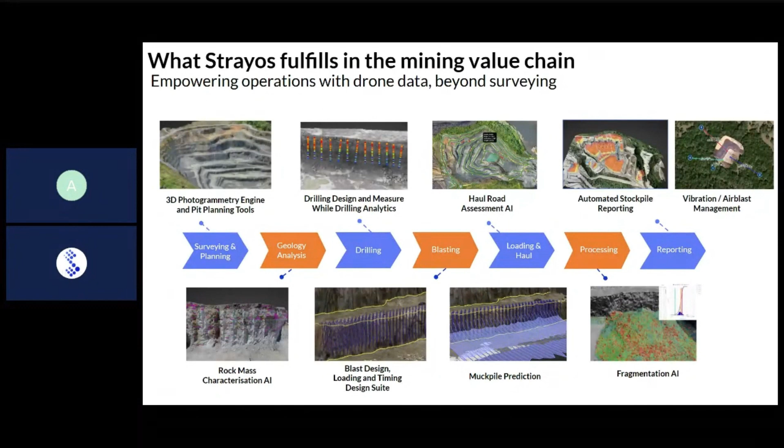Strayos is really a one-stop shop software with its internal photogrammetry as far as its value chain of processing information. At its core, Strayos is its own photogrammetry engine where we can process imagery in data sets, pre-processed models to perform a lot of different tasks within the same software. That really starts with the survey and the planning, moving through geology analysis, drill and blast, loading and hauling analysis, as well as post-blast analysis, as well as stockpiling and reporting, all of these modules together through a lot of automated reporting features.

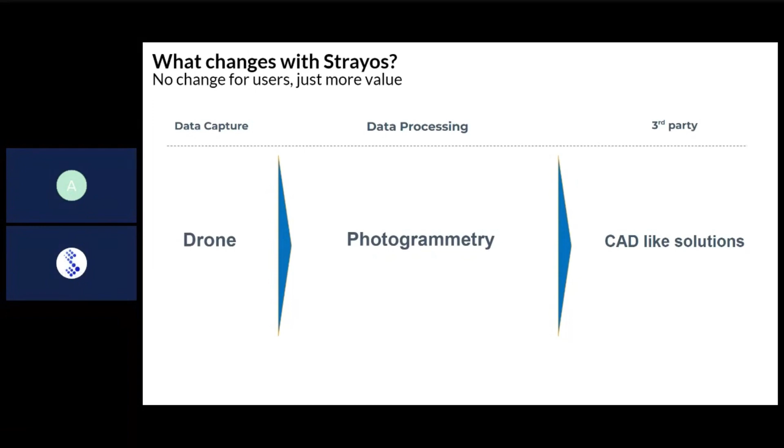So for the end user, it really starts with the data capture. The workflows are essentially going to remain the same for the end users, and that's flying the drone, capturing the data, processing it using photogrammetry, and then bringing those into, let's say, third-party solutions such as CAD-based softwares. However, now with Strayos, this can all be done within one software. So instead of processing photogrammetry in an external software and bringing it to third-party softwares, it can all be done within one.

So here, again, the data capture can be carried out and uploaded to Strayos' cloud-based platform, where we can process using our own photogrammetry and our AI modules to get more value out of one software. Again, a lot of the outputs of Strayos can still be brought into third-party solutions for further analysis. However, the photogrammetry processing and the analysis that can be run in Strayos brings more value to the data capture that's being done.

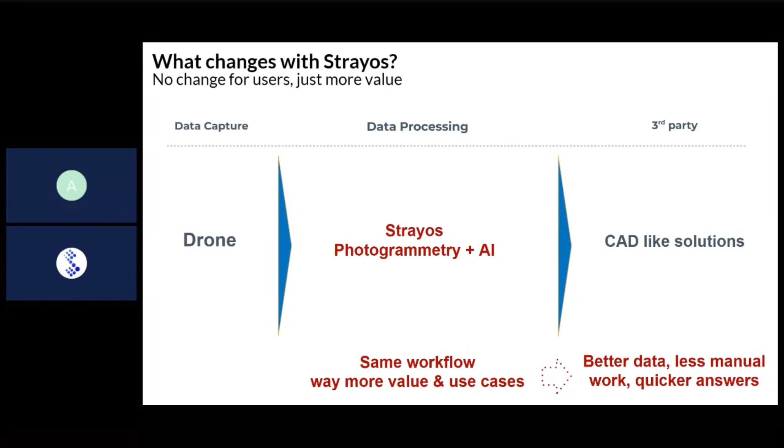So with that being said, we're going to transition into some of the modules and the AI features within Strayos, really where this value comes from. And we're going to look at some use cases, specifically in the quarrying and the mining environments, starting with inventory management. And you can see as we work down the list here, we'll touch on several topics where it really ties into those direct operations that Adrian mentioned.

So beginning with the inventory analysis. Strayos really incorporates its AI in stockpile detection and applying this to the site and the data that's being flown. So this is going to really cut back on the surveying costs of these piles, where a drone flight can capture the data much faster than a standard survey crew. And we apply AI to this with the auto detection of these stockpiles, where users can then apply their material databases to those piles to achieve volumes, tonnages, prices of the materials they have on their site.

Now, this serves as a direct workflow, whether the surveys are being conducted daily, weekly, monthly. There are dashboarding features here where these materials can be tracked on that frequency basis. Again, you use the AI to really cut back the time of the survey cost in the analysis of quantifying these materials.

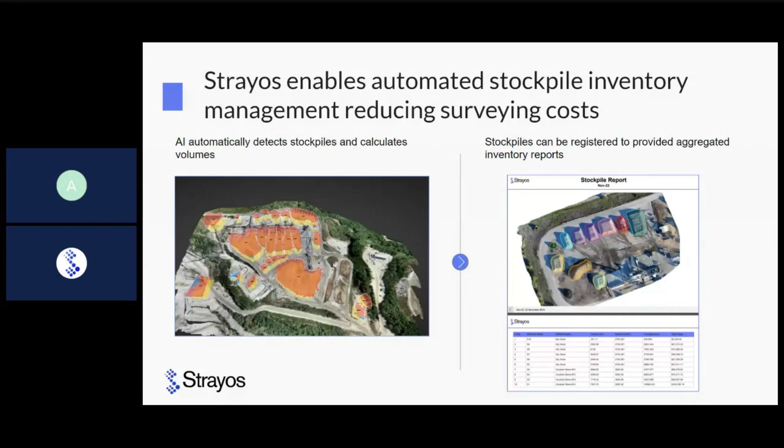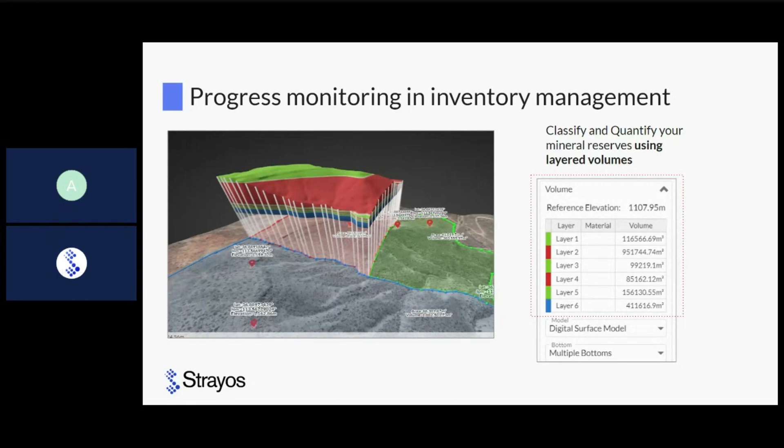Now, we can also apply this to some monitoring of inventory on site. So yes, we can monitor the stockpiles and volumes, but also if we're doing some short to mid-range pit planning, really monitoring how much material is being mined or removed from the site, whether that's through a stripping operation or monitoring material that's been quarried or mined at different level of benches. There's multiple ways where we can run this analysis in Strayos to quantify that pit progression over time and convert it into inventory management.

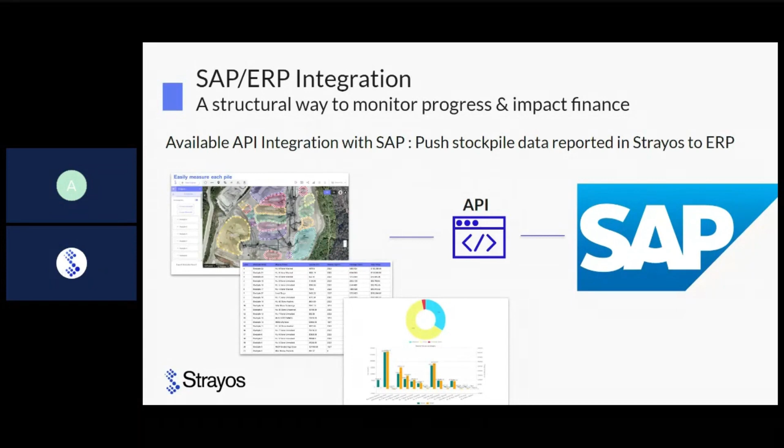We also have an API integration with SAP. It's important to mention where we can push this data reported from Strayos. Again, feel free to reach out to our team for more information regarding this. Did want to mention it here in the beginning with that reporting function.

So moving forward to our haul road assessment, I just want to take a pause here. Adrian, everything sounding clear and presenting well? Yeah, I think that's fine. There was just one query where someone said that they just saw the Strayos logo and not the slides, but that only appears to be happening for the one person, Joe. I've just checked with Mike Williams, and his screen's okay, and Mark Little from Tarmac just confirmed that he's seeing it all okay as well. Okay, great. We'll keep moving forward then.

Now, there's a direct benefit and value here where you're getting all this information from that drone flight that you are capturing from the original data. So there's no need to do additional manual surveys for this information. You're essentially getting all the value from that drone flight itself. Now, this information can also be reported and exported in different file formats such as DXFs or CSVs to bring in to third-party solutions.

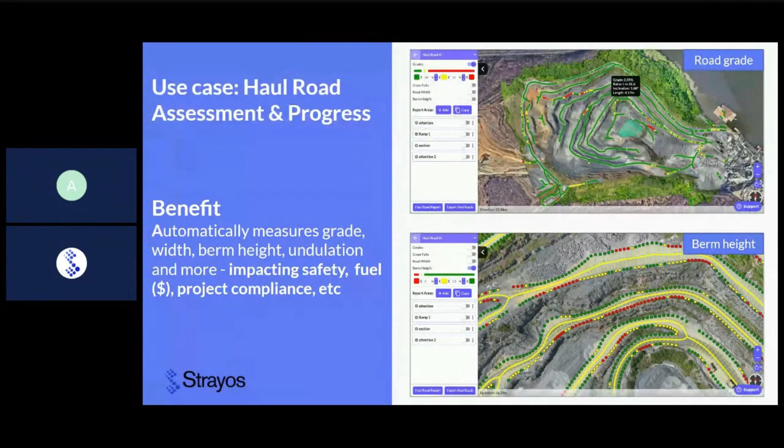But overall, the benefit of monitoring these haul roads is really coming into the compliance and looking at safety, fuel, how these trucks are running on these sometimes larger, lengthy sections of haul road, where grade changes can have a direct effect on the equipment wear and tear and fuel costs. I did mention the progress reporting. So looking at certain aspects of these haul roads here.

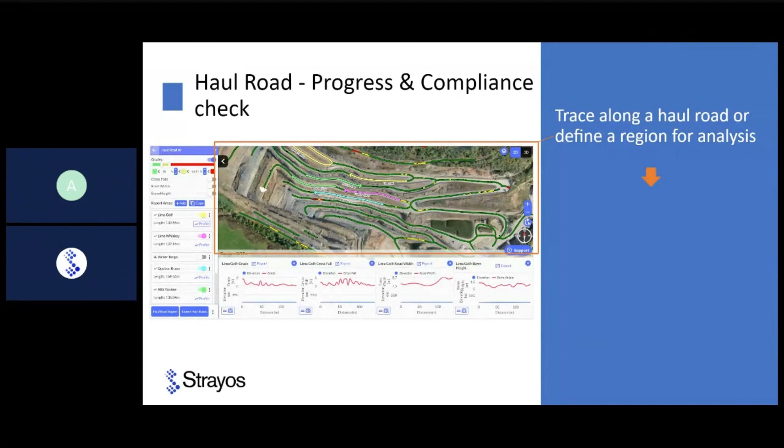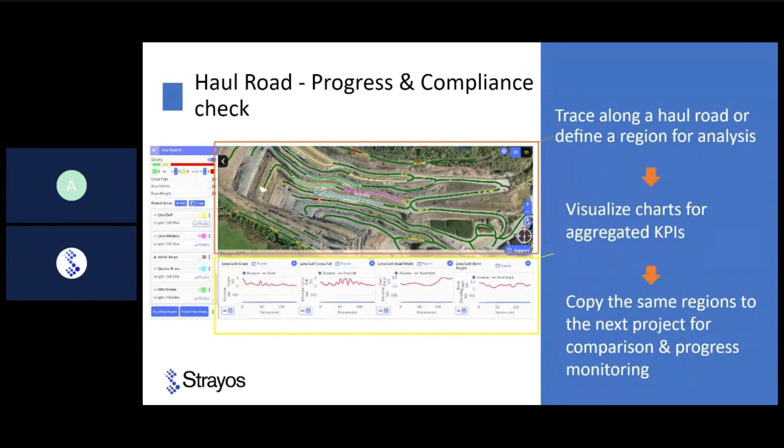So certain cross sections can be drawn or traced where we can report more granular sections of, let's say, grade or road width of areas that we want to further report. You can see the KPIs are on the bottom there, and we can copy these areas of interest, I'll say, from project to project. So if there's sections of haul road that are looking to be analyzed over a time span, if it's under development or if improvements have to be made, those can be monitored flight by flight.

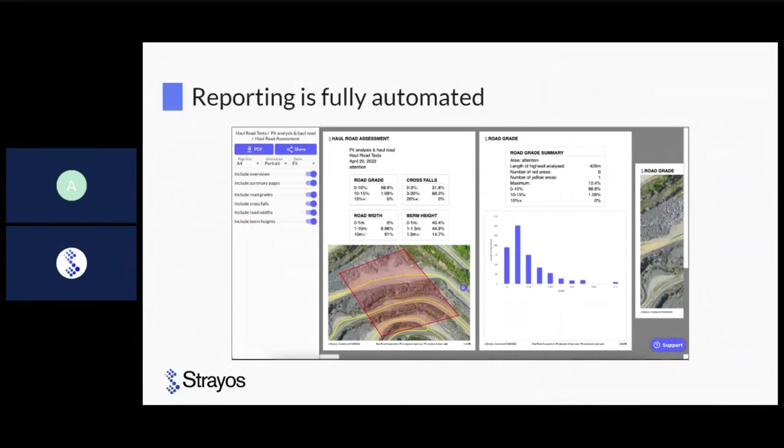Now, I mentioned the reporting as well being completely automated. So with the function of the haul road, as well as some of the other modules we'll cover in Strayos, these automated reports are going to provide the information that can then be shared directly with team members with a PDF or a share link for further reporting and analysis.

So what we can see here is just a snippet of one of the haul road reports where there's an area of interest that has been drawn, showing the grade, the crossfall, road width, and berm height in the thresholds that have been set by the user. So this automated reporting really streamlines the workflow for customers to report what these surveys are producing and what areas may need improvement, may need to be addressed, at a very direct pace here.

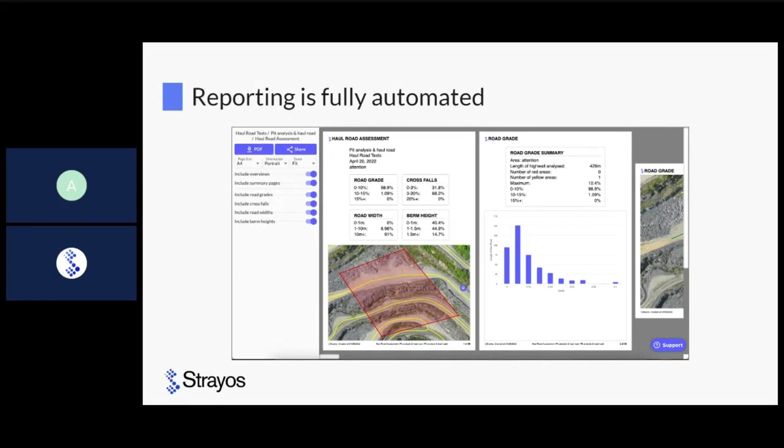So with the haul road modules of Strayos, there's a case study here that we wanted to share where a certain mine customer began to monitor these haul roads, which really ended up in a direct savings of, you can see here, 27% for the transportation of 10 million tons of material. Looking at the crossfall management as well, after precipitation events, rain, snow, whatever it may be, runoff, monitoring this condition really helped improve the condition of the road with less maintenance or understanding where the maintenance needs to be addressed, saving in the diesel costs.

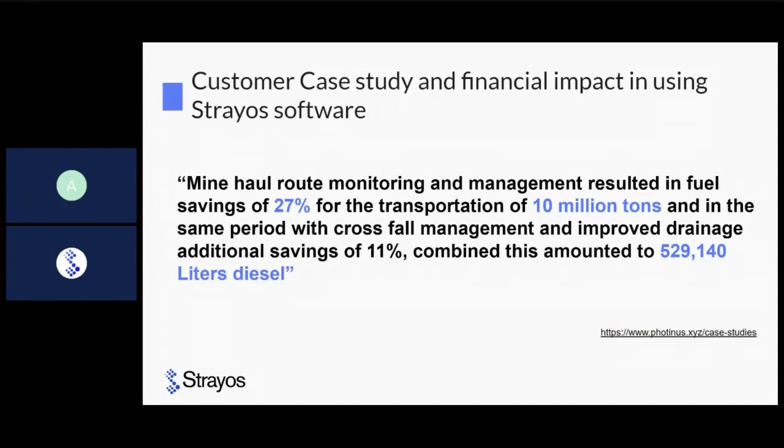So, just one example here, kind of overviewing one larger case study. We're happy to share some of these metrics on how that value can be saved from monitoring things such as the haul roads. To summarize, the up-to-date haul road assessment can really help improve cycle times when you're looking at haul routes, conditions of those roads, wear and tear, especially fuel costs, and essentially helping improve safety. Any road incidents, looking at traffic patterns on some larger sites where haul roads might have a more intricate network. All these points can be looked at and derived from the haul road planning and analysis within Strayos.

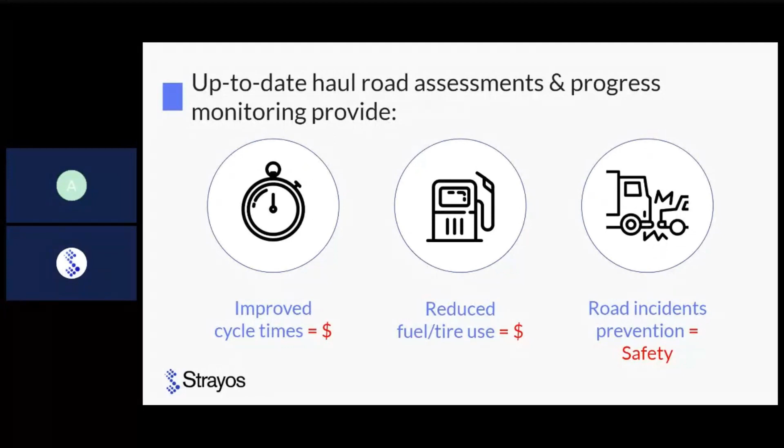So moving along to the high wall and slope safety geotechnical analysis. So another area where we can apply AI to really shorten the workflow that has been done traditionally in a more manual state in the past. With that being said, Strayos has the capabilities of detecting the crest and toe automatically within the site. Based on that crest and toe detection, we can then derive things such as the high wall heights, the face angles and inter-ramp angles, and catch bench widths of the site itself.

So on the images on the right-hand side of the screen, you can see the face angles on the top, as well as some cross sections that are drawn on the bottom. Now, users have the options to set different thresholds here, report certain areas similar to the haul road, where we can analyze this data bench by bench, maybe area of the quarry, to really look at what could be out of compliance, within compliance, where we could be seeing that geology change within the site and how that's reflecting on the physical characteristics of the site here.

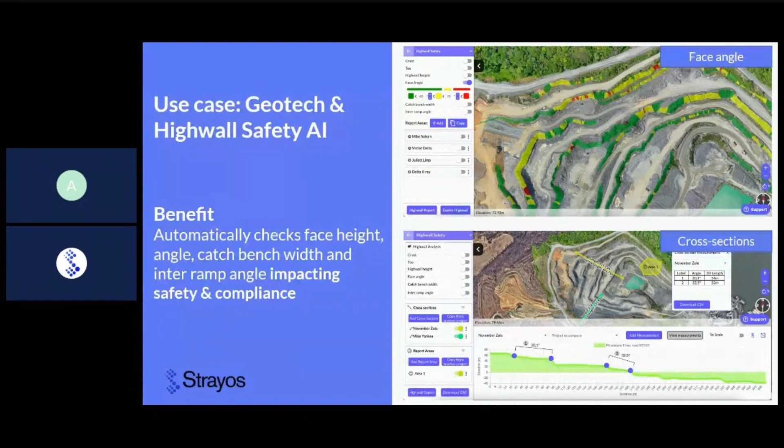Specifically looking at the cross sections on the bottom here, we can see those sections that are highlighted where that inter-ramp angle is shown, as well as the distance and the elevation profile. So the direct benefit of having this tool is it really cuts down on the time of manual surveying, and you're getting this information out of that one drone flight that's been done in the pit. Now, looking at the benefit of doing that, really running on compliance and safety, where we can constantly monitor these conditions based on the frequency of the drone flight.

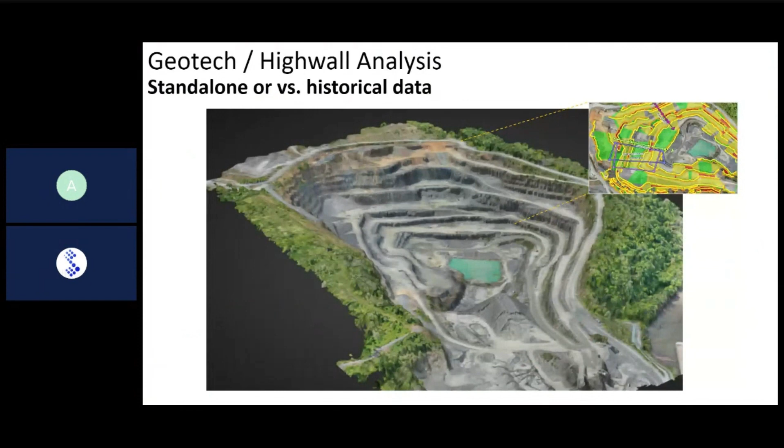So we can see a 3D model now shown on the screen here. And this is really going to allow us to look at the data both in 2D and 3D. The picture on the right here is showing a snippet of the 2D where that crest and toe analysis is being run and some areas of interest that I want to share, what that is going to look at specifically on a statistical basis.

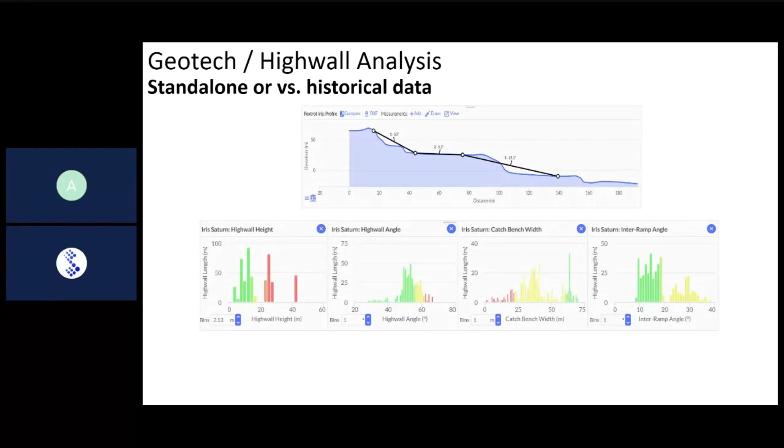So again, with the reporting, I do want to share a little snippet here with the automated reporting on the high wall analysis. Based on the crest and toe detection, again, we can look at these metrics that are being derived, such as the heights, face angles, catch bench widths, and inter-ramp angles. This can all be compiled into that report that can be shared with team members via PDF or share links.

It's going to give a good breakdown of each of these metrics and the area of interest that is looking to be reported. In this case here, on that cover page, we can see the green area that's highlighting that one bench.

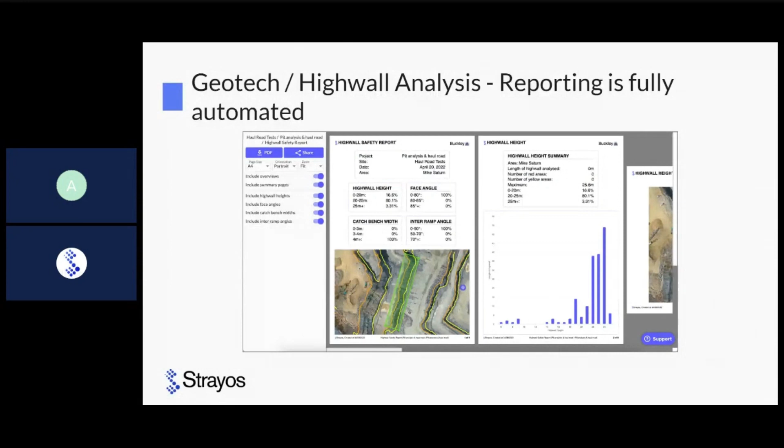So another critical aspect I like to point out here with monitoring is the capability of uploading a pit plan, a mine or quarry plan, surface file, to Strayos to overlay to your drone model. Now, again, taking the value of that one drone flight, what we can do is upload and overlay that surface file to look at conformance.

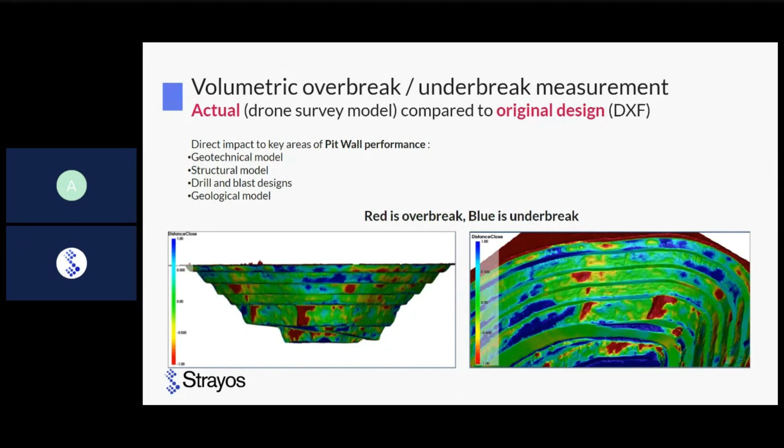And this can be done very easily in the Strayos platform, where with these surface files, we can upload an overlay to the drone model to visualize these metrics. We can also apply AI to rock mass detection, and that's going to automatically detect discontinuities within the rock mass, whether that's bedding planes, faults, joints, seams in the rock face.

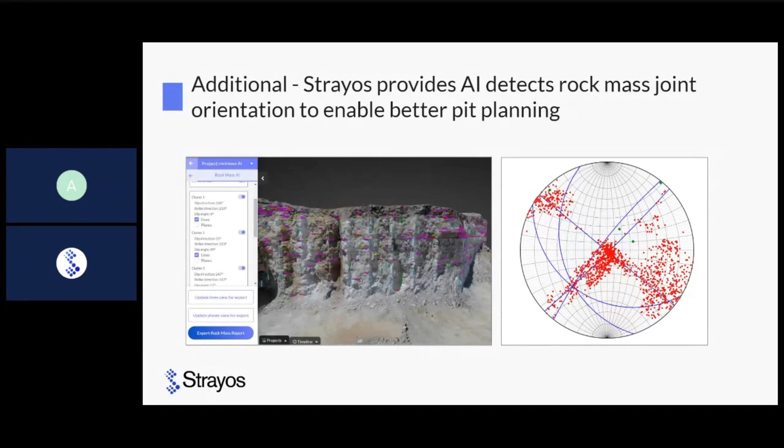It is important to mention tools like this are very valuable, and the data that we input for such analysis requires good accurate imagery with low GSD and some oblique imagery of the face. That high quality imagery gives the best yield of results for this AI detection. So just an important note here I want to share, we want to get the best quality imagery possible for such data output, such as the AI detection of these discontinuities.

So what's the value in these up-to-date high wall assessments? This is providing direct information on our site and the geologic conditions on the site, specifically looking at safety and where we can look at potential high wall failure areas, looking at slope analysis, specifically where we could be seeing changes, whether it's weather events, freeze thaw cycles, how these high walls are changing, where we're seeing commonalities in the high walls.

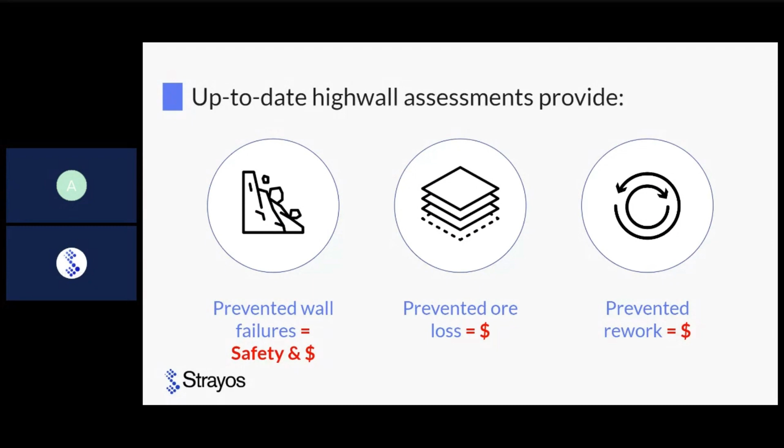We can take a lot of information from these drone surveys to compile and compare over time and how to monitor these conditions. Preventing rework or loss, these go along with that as well. So, looking at the pit progress and conformance.

So, we talked about overlaying some of those design data sets to our, as we'll call them, as-built conditions or the surveyed conditions. Now, with this, we can really monitor volumes, measure mine reserves, identify areas of non-compliance, look at cut fill quantities in several layers, such as elevation models and contours.

Specifically looking at, when we compare these surfaces and monitoring, let's say, cut fill quantities, whether you're flying your site, let's say at the beginning of the month and the end of the month, or maybe on a weekly basis or even a daily basis, we can monitor these cut fill quantities, whether again it may be a stripping operation or drilling and blasting operations. We can run that analysis within Strayos and also overlay different layering if we want to compare contours, elevation models, or those surface files in the DXF to identify areas of non-compliance.

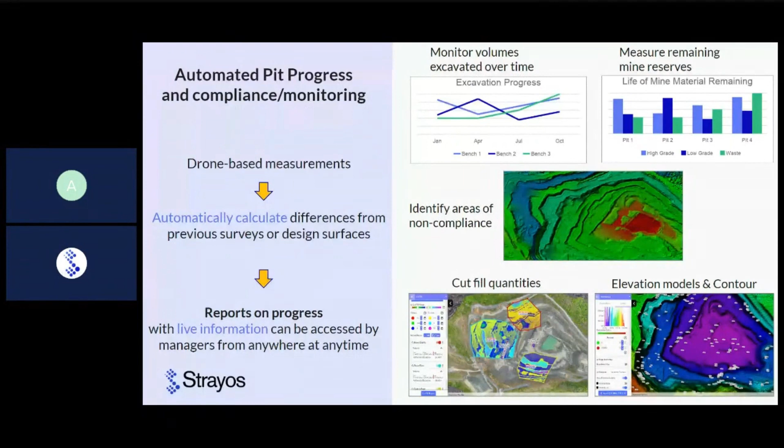Again, the reporting function, we looked at some reports with the haul road and the high wall. It's automated, and you'll see these automated reports in modules such as the cut fill and the elevation exports as well. And this really serves the benefit to the user where you could bring in your drill and blast team to work alongside maybe your quarry planner, quarry engineer to really make sure operations are running smoothly based on the drone data capture that's being done to report these.

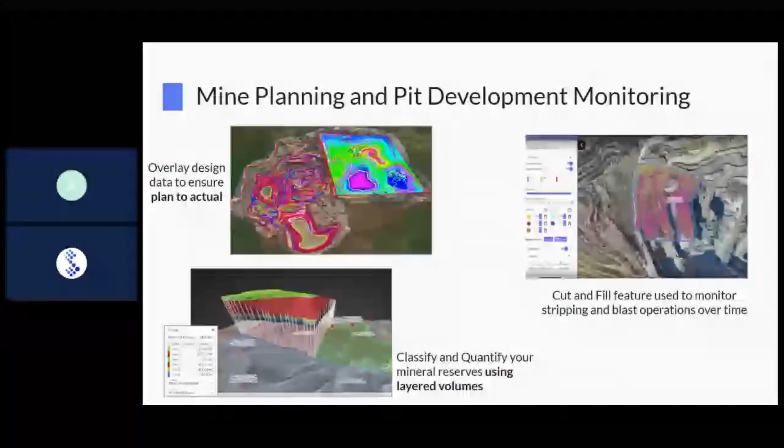This can really help, I'd say, improve the pit development and maintain the operation that's being done by monitoring these conditions. As I mentioned, monitoring grades, elevations, haul road conditions, all these physical characteristics that can slow down the operation can be monitored and I would say kept ahead with to make sure operations run smoothly on a daily basis.

Last example here I'll talk on is drill and blast. Strayos has a robust drill and blast suite of tools where users can create a drill design or bring in, let's say, a drill design that has been done maybe in a third-party software. With that design, that can then be exported to a GPS or maybe a GPS-equipped drill. That can then be used to lay out the design properly based on the model that's been formed by the drone data capture.

Within Strayos, we can export, again, this information to the drill, but also bring information from the drill to really close that drilling cycle. So this really does start with the drone data capture, flying the bench that's going to be drilled and eventually shot. If that's utilizing a GCP workflow, maybe an RTK drone or PPK processing to get the absolute accuracy of that model down to, let's say, a centimeter grade level precision to make sure that information relays to the GPS properly and you're getting the most accurate layout you possibly can.

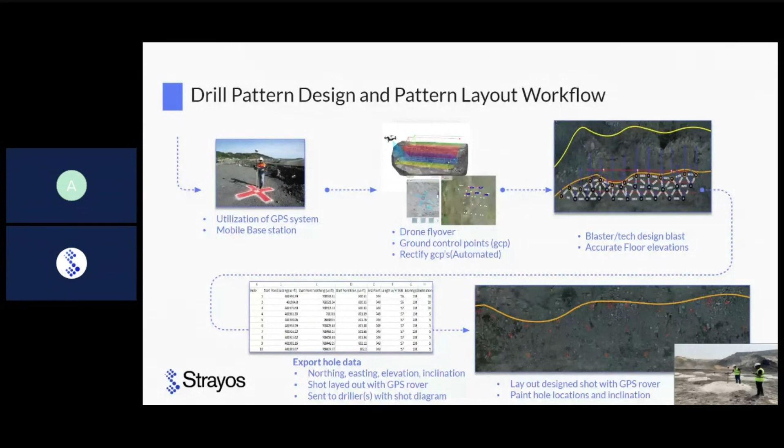And we can really properly load these boreholes based on the condition on the site, the products that are being used, and optimize the timing to adjust, let's say, the throw direction, where we might want to open that shot, or address any vibration concerns. This can all be done within the loading and the timing of the drill design in Strayos.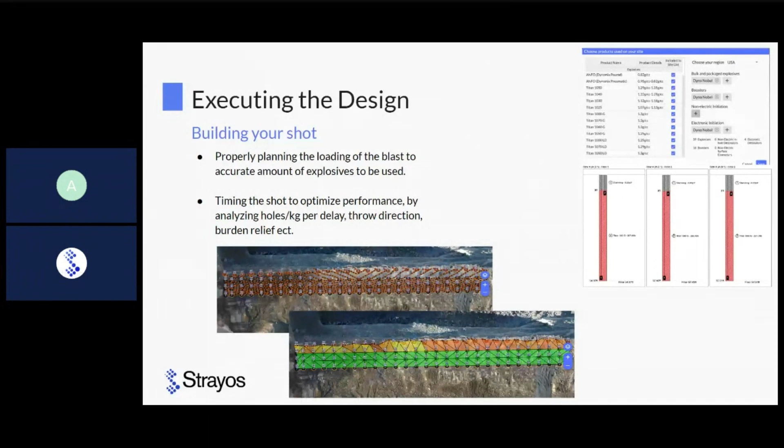Talking a little more about drill control, I did mention it before. Strayos has the capabilities to export these drill designs and the information to the drills equipped with GPS or smart drill capabilities. We pull that information from the drill. So in this case here, looking at a post-drill workflow, once that design is completed, the shot has been drilled. Again, Boretrak. Boretrak is a method of measuring the deviation, inclination of the boreholes.

We can accommodate that data into Strayos as well, providing burden reports and also drill plans post-drill. So with this workflow here, really getting the accuracy of laying out the shots properly, sending that to the drill to be drilled, minimizing drilling costs, extra holes that may have been drilled, drilling to proper grades. There's a lot of value that can come from utilizing this workflow.

Drilling face holes to the correct burden and also measuring that with any Boretrak that is being done on site can really ensure the safety of the loading process when shooting an open face in close proximity to any structures. This again, utilized all in one software, is really where the value is going to stem from.

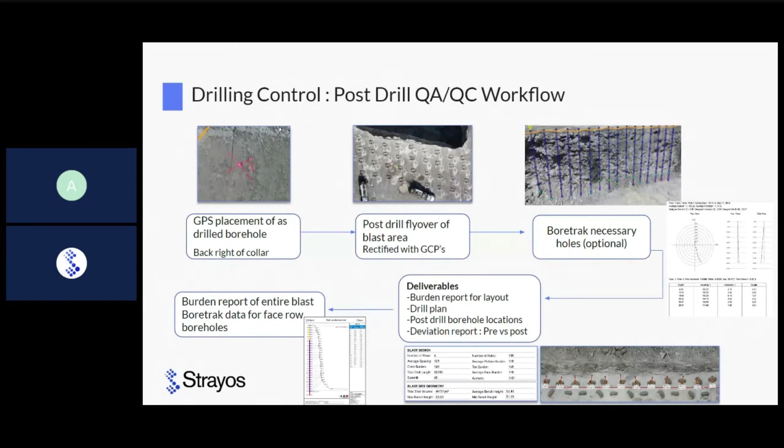One of the unique AI features I want to touch on with the post-drill workflow is the hole collar AI detection. So what we're looking at here in the image is the AI detected boreholes that have been drilled. Now, Strayos has the capabilities to overlay a design to that AI detection where we can see, in this example, the red holes are out of the threshold of deviation based on the design.

So depending on what that threshold is, maybe it's half a meter, maybe it's 1 meter or exceeding. This is telling us that that hole was drilled outside of that design threshold. And this is a good quality control check where maybe the driller couldn't approach that crest as close as was originally planned. Maybe there were seams or voids in areas where that's going to start deviating the hole position.

This is going to help us run a quality control check. And we can see on the bullseye diagram on the left kind of where those holes are falling into place based on the accuracy.

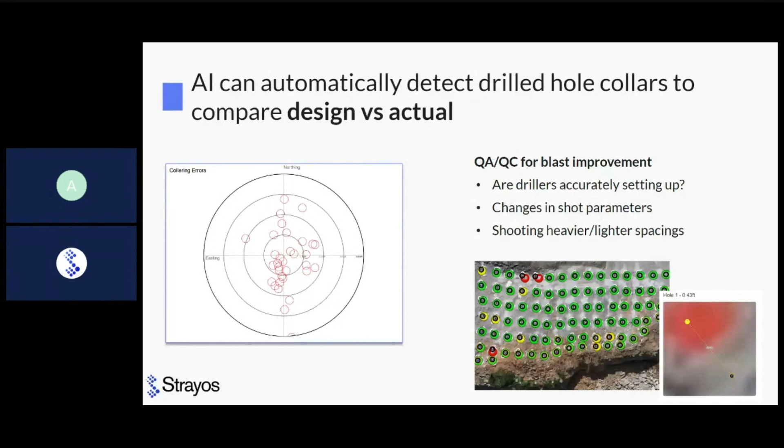Going along with this is our floor control. This is going to allow us to analyze the floor of our pit or quarry and overlay drill designs to that to show any, let's say, high or low spots. Now, this can be run just based on the drone model that has been attained. We can also apply a DXF surface to compare design to this.

However, the value that's going to come out of this is analyzing, again, the high or low spots in the floor. And if that came from digging out, let's say, sub-drill, or a bench wasn't drilled to the correct elevation, we can really look back and overlay these drill designs, as you can see on the bottom right-hand side of the image there, to what shots or even what holes may have correlated to those issues.

In that image as well, you can see the green areas are right on grade to that set elevation of 3.87 meters, where the red area starts approaching 8 meters below, and the blue area is about 8 meters over. So pretty big elevation change there in this example, but you can really fine tune this to a meter or a sub-meter level to look at the smaller granular changes in the floor based on, let's say, the drilling and blasting operation.

Again, this is going to serve, let's say, the loading and the hauling: the smoother the floor, the smoother the operation. If you start seeing high or low spots, this can really help you address where those grade changes could be occurring, whether it is from the drilling or the loading and hauling process.

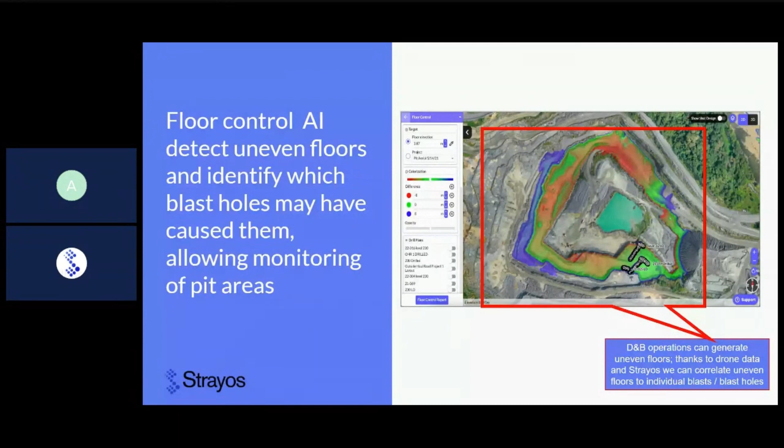Another real example, kind of more of a case study here: analyzing the post-drill condition versus the design can really look at potential fly rock areas or maybe even cut-off potential if holes are too close to one another, and how we're going to adjust our timing or our loading practices based on those conditions.

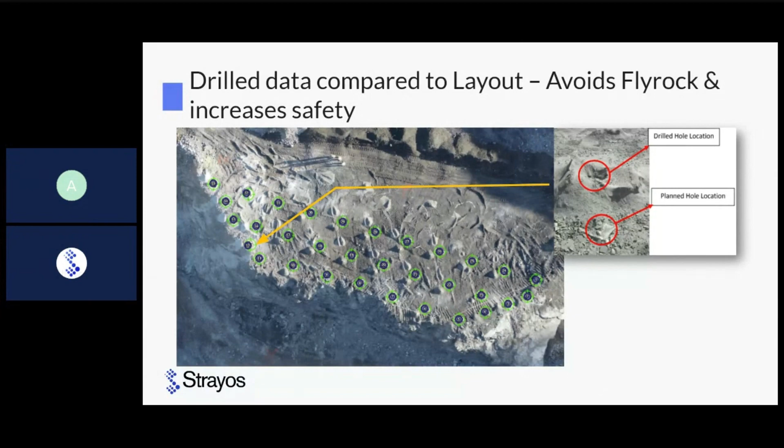If you have the luxury of flying these benches pre-blast but post-drill, you can look at those design changes before showing up the day of the shot, where you could be making some critical decisions in a short amount of time. This allows explosives engineers, blasting engineers to really look at their as-drilled designs before showing up that morning to blast and make those changes to their loading and timing plan.

Lastly, with the drill and blast process, here is the fragmentation topic. Where we can apply AI to this is the automated detection of the muck pile post-blast. Strayos can run predictions and also analyze the post-blast muck pile to report the fragmentation results.

Now, this can be done, again, with the drill design that's been accomplished through Strayos. You'll achieve the prediction, as we can see on the right-hand side here, with the distributions shown in the distribution curve and the parameters shown on the left-hand side. And then on the left-hand side of the AI measurement, this is showing the post-blast muck pile, where we can run the post-blast analysis and report those actual fragmentation measurements based on the AI.

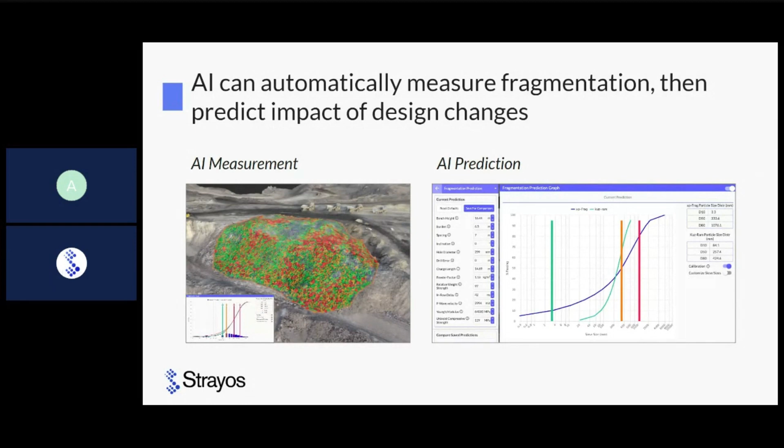Again, a valuable tool to use to really analyze that post-blast result and look back to address any design changes. If there's excess oversize that has been seen on the site or excess fines, really start to adjust that drill design to achieve the optimal outcome that's being looked for on the site.

This can also be applied to the muck pile as well, where we can look at a full cast analysis of that muck pile, looking at elevation profiles, the center movement, average height, maximum throw, average throw of that muck pile, to really look at the blast performance, whether we need to maybe speed up our shot a little bit timing-wise, maybe slow it down, depending on the operation, if it's a loader-based operation or excavator-based digging operation, how we want that muck pile profile to cast to optimize the digging.

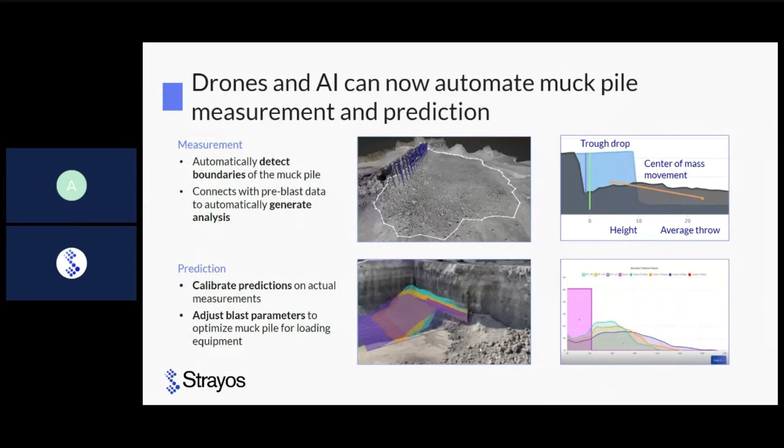Again, this can be done just with the drone flight post-blast to look at that muck pile boundary, tie it to the pre-blast project, and we can look at this analysis to make better predictions in the future, but also optimize our operation to get the best production from the blast itself.

So to summarize the D&B quality control, really what Strayos is helping here with is optimizing these designs to improve the diggability and crushing rates on site. Drilling is the main cost here, so if we can help reduce the drilling costs, reduce excess holes, excess drilling, that's really going to be the bottom line cost savings there, essentially reducing the overall drill and blast costs.

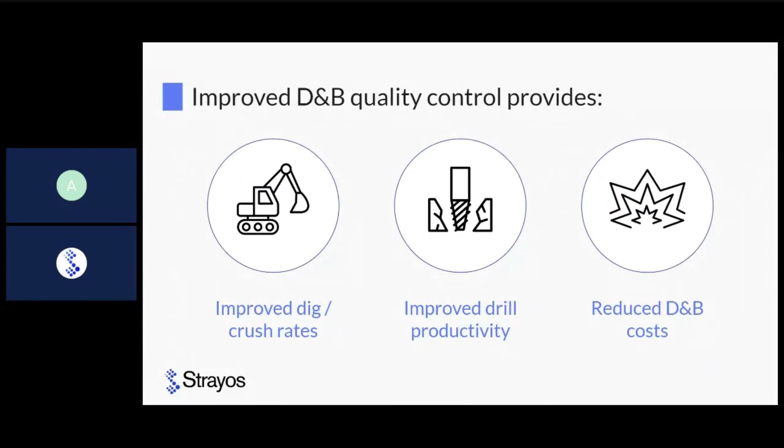A big safety factor comes into this as well, making sure patterns are designed properly with appropriate burdens, to really get the best out of our drill and blast operation. Again, tying back to improving the diggability and crushing rates and throughputs on our sites. So I'll conclude my side of the presentation here.